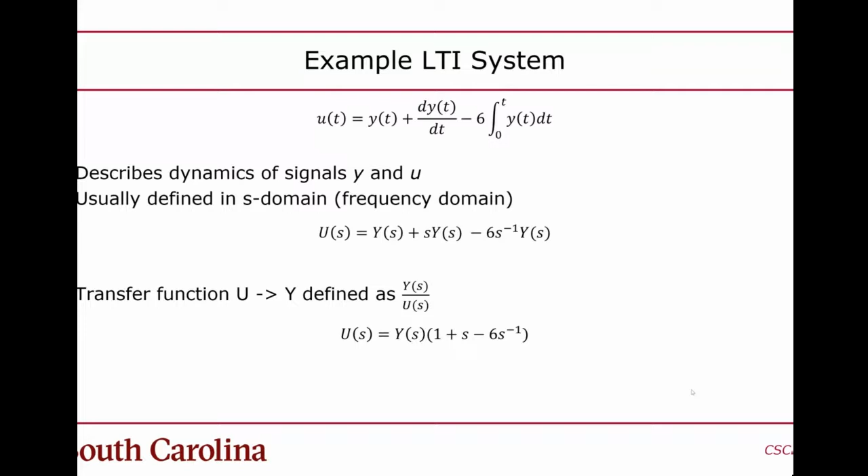So we talked also about stability, and so an LTI can be stable or unstable. The definition of stability is that if a system defined by an LTI is stable, it means that we will always get a bounded output as long as we give it a bounded input. Any bounded input should give us a bounded output. Now this is kind of complicated because you can build a system that is stable for some frequencies and not for others. But if that were the case, it would not qualify as a stable system because it has to be bounded for all inputs that are bounded. Now, what does that mean? Well, it means that it doesn't go to infinity, basically, as an unstable system would.

And so I mentioned that the goal of control theory, really, the objective of a controller, of a control engineer, is to bring stability to an unstable system. But it's a little bit more than that, because usually you also want the system to operate at a set point as well. So it's a little bit more than just making it stable. You want to make the system operate at a desired set point.

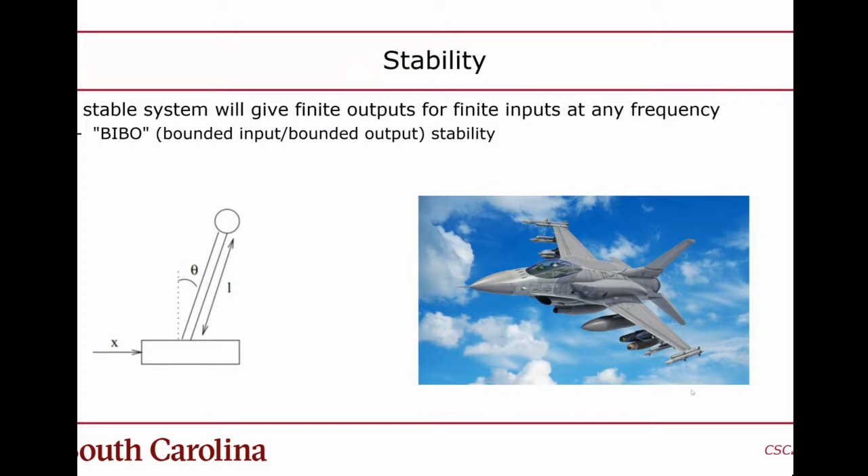So how do you know if a system is stable? There's several ways. You can hit it with an impulse response. The nice thing about impulse response is that an LTI system, if you convert it to the S domain, is already the impulse response. It's free. All you have to do is basically do the inverse Laplace transform, and that's it. That's the impulse response. So by definition, all of these transfer functions that we look at are already in impulse response form, because the S domain version of the impulse is 1. It's a constant. It doesn't have an S in it.

Now, if you want to do something like a step response or a ramp response or a sinusoid response, then it's a little bit more complicated to figure out what the response to that is. The way I do it is I just simulate it in software. There's probably a way you could work it out on paper, but like I said, I'm not even sure how to do that.

I think generally speaking, you just run it through a simulator, which is where all the results that I have in the slides here are actually from. But the impulse response is something that you could work out on paper, and the only thing I expect you to be able to do is to work out the impulse response. Also, you can find the poles.

Now this part is pretty cool because the poles are basically the values of S that will make the transfer function infinite, or make it divide by 0, basically. Now I mentioned S, of course, is a complex variable. So when you assign a value to S, then it's complex. But if the poles are values where the real component is less than 0, that means that all of the poles are in the left-hand plane.

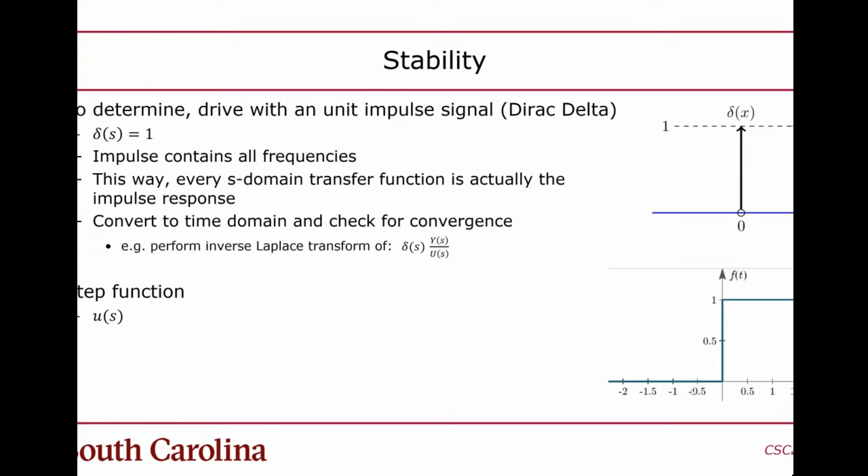Okay, so the impulse, the Dirac delta, is the impulse. It's basically an infinitely narrow pulse, usually at time 0. And then there's a step function, which is when you take the impulse and you do an integral of it, which of course in the S domain is multiplying by 1 over S. So those are two different possible inputs. So here is, I think I got to this last time. Did I cover this?

Hold on one second. Oh yeah.

So let me skip ahead a minute to transfer functions. I presented this a little bit in a weird order, so I'm going to skip ahead. So what's a transfer function? A transfer function is a way to represent a plant or a controller. Basically, you can put it in a block diagram. In a block diagram, it would be a block, and you'd have an input and an output signal, and they can be time domain, but generally speaking, you do this in the S domain.

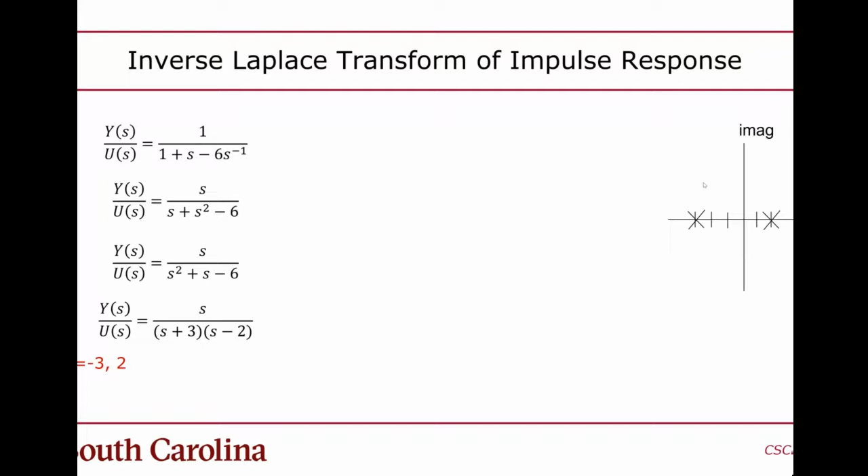Now you might say, wait a minute, are all your poles going to have a 0 imaginary component? Yes, in this class they will. We're not going to do any poles that have an imaginary component. So the poles are -3 and 2. You expect this to be unstable because of the 2.

And so to do the impulse response, the only thing in terms of manual responses that I'll expect you to do is to take the transfer function and decompose it in a way that allows you to obtain the eigenfunctions. The eigenfunctions are terms in the form of a constant over s minus a, because when you do the inverse Laplace transform, that is e to the at power.

That sounds complicated, but really all I'm saying is let's do some algebra to split this denominator into its parts, s plus 3 and s minus 2, because I don't know how else to do an inverse Laplace transform when you have a polynomial. You have to get it into the proper form.

I mentioned last time that you can do this by saying you want a over s plus 3 plus b over s minus 2, because that will be the split, and you want to solve for a and b. That'll be the decomposed transfer function. You can assume this is what you want, and if that's what you had, you could go back and recombine them by saying a times s minus 2 plus b times s plus 3.

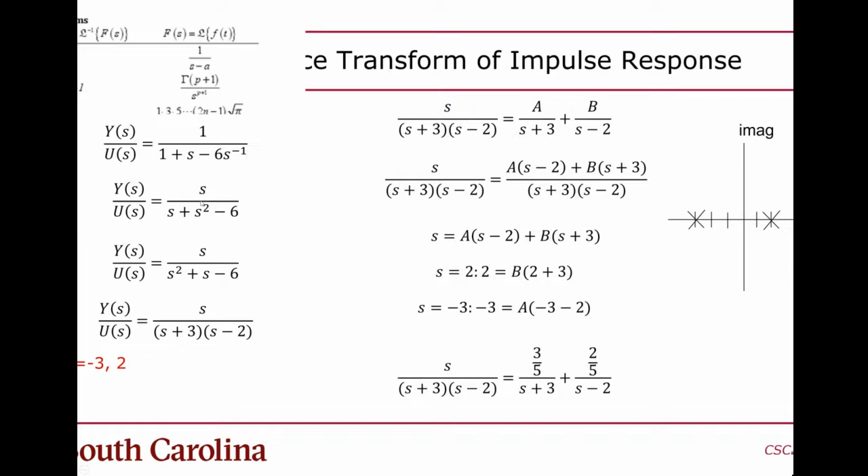And so you convert each of these pieces to e to the at, where a is the constant in the denominator, and of course the numerator you can just move out to the front. So this ends up being 0.6 times e to the negative 3t and 0.4 times e to the 2t. These are the eigenfunctions. And because these are in time domain, you can just vary t and plot this. You can plot the value of the function versus time.

And this now, it's a little weird though, because what you're not seeing here is the input. The input is the pulse, the Dirac delta, right? So you generate the plot for this, and you see that when you plot it, it's not bounded. The value just goes to infinity as we increase time. But you have to understand that what you're seeing is the impulse response, which seems crazy because you never actually hit it with the impulse. You just did this eigenfunction transformation, you increased time and you got the impulse response.

You can also do a step response, which I don't know how to do by hand, but I did it in MATLAB. So step response is just basically where you go from 0, you step it up to 1. Now, both the impulse response and the step response contain all frequencies. It requires an infinite number of sinusoid frequencies to add together to get this kind of step shape, right? And so this is why this is a good test for stability, because this is going to basically feed the function every frequency at once.

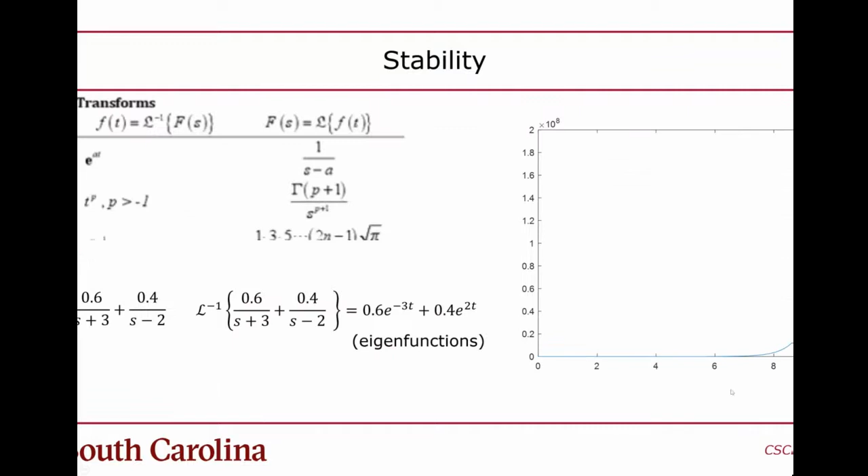And then of course you can hit it with a single frequency. This is risky because technically it's possible to give it one frequency and it not go to infinity. But in this case, I gave it 2 radians per second because in fact that was one of the poles. But I tried to give it a couple other ones, and it was still blowing up on me. So no matter what input I gave this function, it diverged to infinity.

Anyway, so let's look at another one. I changed the denominator in this transfer function to s+3 times s+2. That way I have 2 negative poles. This puts the poles in the left-hand side. And then I worked through the same math, and I got A is 3, B is -2. And so I got slightly different eigenfunctions here, which don't look that different, but boy, you get a much different impulse response.

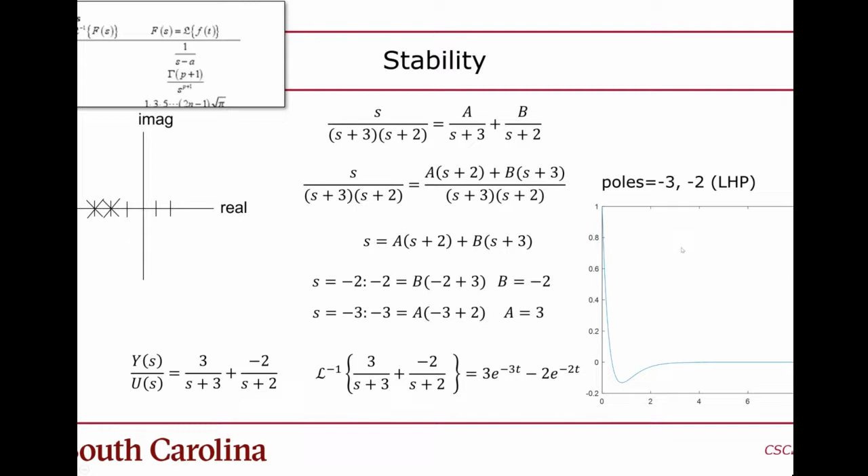And then likewise, I did the step response. The step response, once again, is much different from the impulse response, but it still converges on 0. And then the sinusoidal response is pretty much just the same as the input signal. I don't even get a phase shift here, but I do get an amplitude difference. So the amplitude of the input is 1, the amplitude of the output is 0.2. I don't really care. The point is that it's stable.

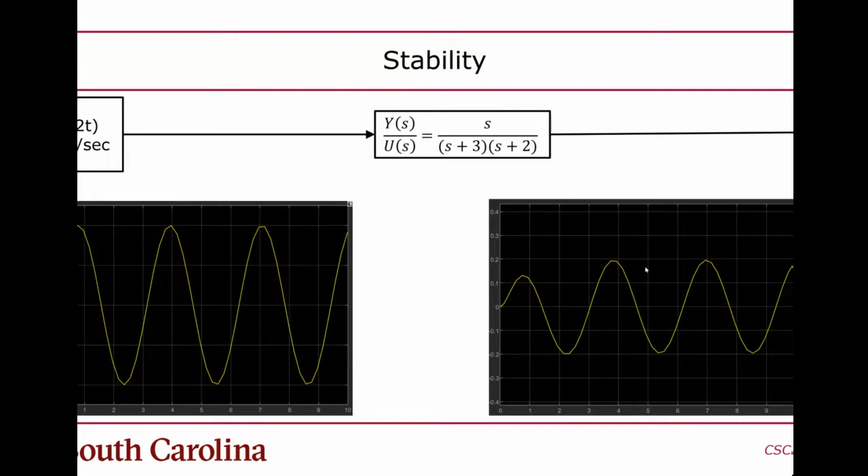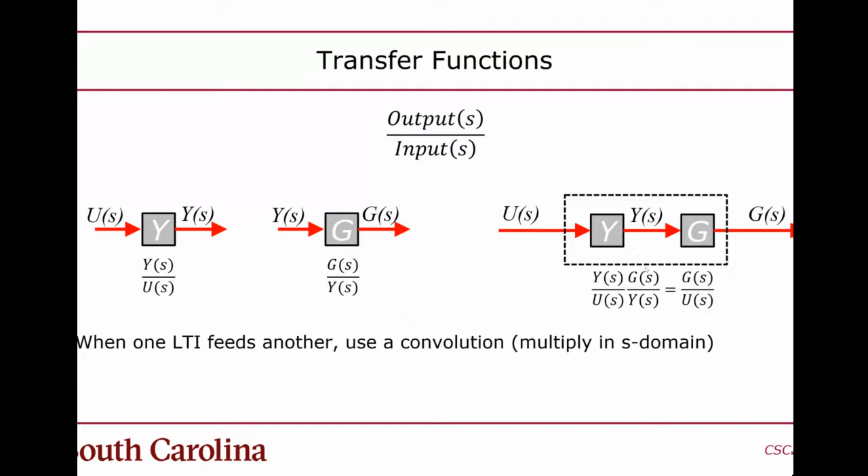Okay, so I mentioned transfer functions. So a transfer function is basically just an LTI S domain put in the proper form, output over input. So these transfer functions are usually just a ratio of 2 polynomials, generally speaking. The denominator polynomial, though, is generally shown with a 1 coefficient on the highest power of S. But again, it's not necessary. You can always adjust it algebraically.

Okay, so then I think last time I just started talking about physical system modeling. So this part gets really complicated. The point of this is that I wanted to show you how you go about modeling a plant. Now, I'm not going to go too much into this because this starts to get into physics or, like, an electrical engineering type thing.

Obviously, we're interested in modeling systems that are RLC circuits, analog circuits. That's a big one. So I mentioned like in power electronics, that's what you're doing. Any kind of pendulum sort of system or any type of motor-based system works well here modeling as an LTI. In flight controls, avionics, in vibrations too. Like if you have a cantilever beam that's vibrating, you can model its vibration using the stiffness and the mass. But doing all that is kind of like physics stuff.

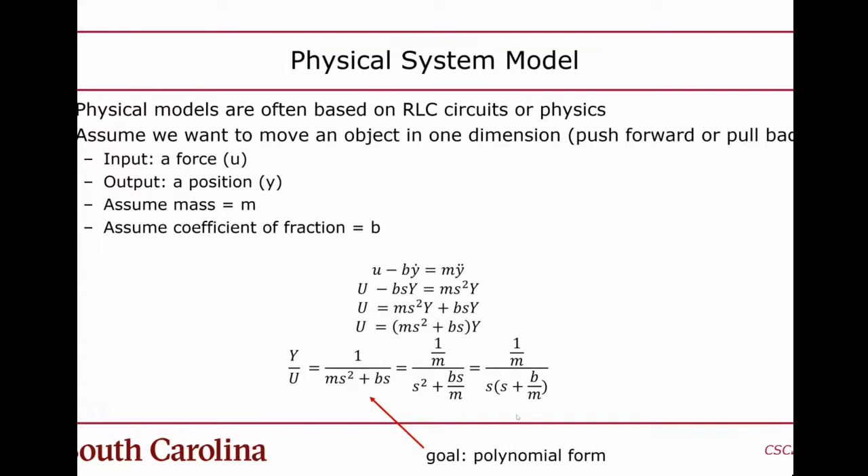Yeah, sorry. That was okay.

So then here's the step response. Predictably, this would be like saying, okay, 0 force until time 1 second, and then at 1 second, I'm going to apply a constant 1 Newton force forever. And of course, as you might imagine, you just push it forever.

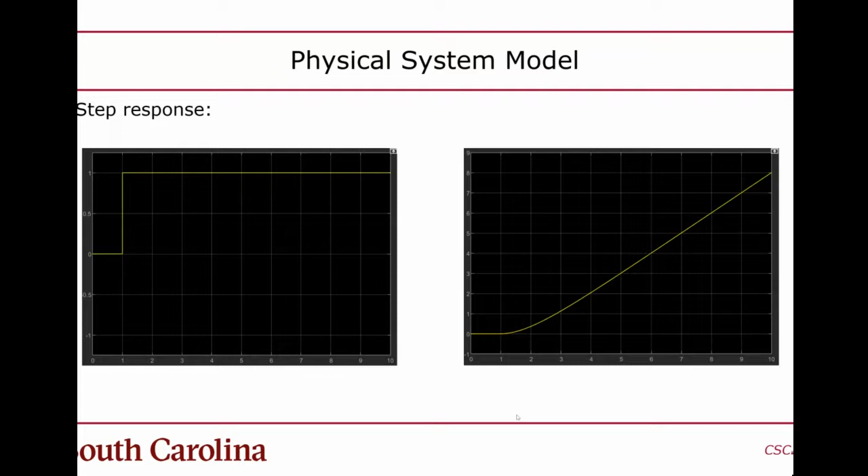So to control something like this, we need a closed loop control, and the closed loop control is when you have the plant, and it will be fed by the controller, and these two together represent a system. You just multiply them together, and you get a single transfer function representing both, and that is actually the open loop controller. So if you're only doing an open loop control, you're done. If you're doing a closed loop control, you have to add a feedback, and the feedback is the output of the plant fed back and subtracted from a set point that you want.

Now, if you had an open loop controller, your set point would go straight into the controller. But like I said, without the feedback, your system can't deal with uncertainties and disturbances. That doesn't mean that people don't use open loop control. It's used a lot.

But closed loop control is common when you have this potential for disturbances. Now, you might think, wait a second, if this was like an RLC circuit, capacitors and inductors and resistors, they always work the same way. Why would you need a closed loop control? Because there's

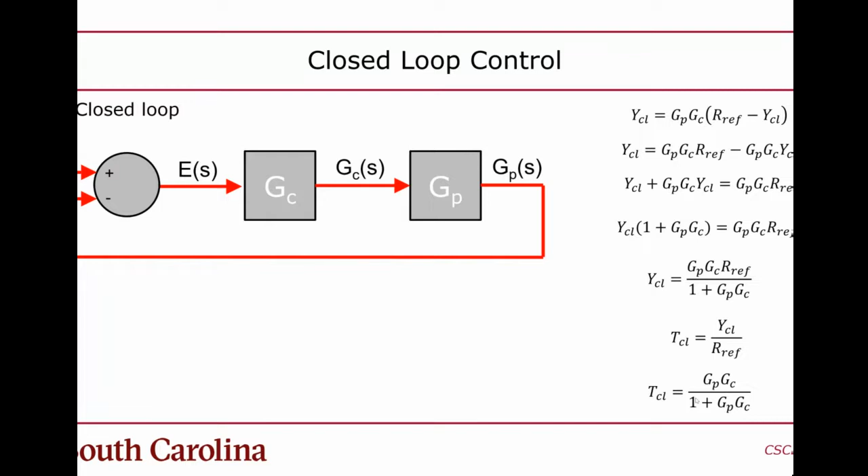But then you're going to take that closed loop thing and you're going to enclose it into a bigger closed loop system in order for the drone to maintain a certain altitude, for instance. So this transfer function is something that is nestable. Basically you can compose arbitrarily complex systems by just applying this closed loop equation, and you can take a whole closed loop system and put it as the open loop inside this outer closed loop thing.

Okay, so what about the controller? We haven't really talked about the controller. How do you build a controller? We talked about how the plant is modeled, but how is the controller modeled? How do we build the controller? Well, there's many ways to build controllers, actually. One way to do it is the PID controller. This is one that you guys, I think, are already familiar with from CSCE 274. I'm not sure how formally they presented the PID controller. The PID controller is pretty simple, though.

Basically the idea is that you take the error term, which is the difference between the output of the plant and the reference, and you multiply that by a proportional control, and that gives you the proportional output. And then there's a derivative where you look at the derivative of the error and multiply that against the derivative control. And when I say control, I mean these are constants that you set when you're tuning the controller. And then there's also an integral control, which is you take the integral of the error and you multiply that against the integral term. So you end up with three constants: kp, kd, ki.

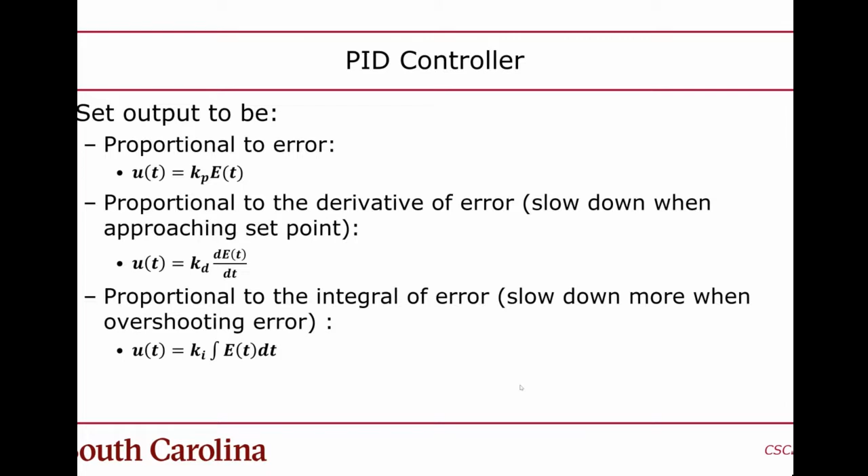And so with the proportional control, you look at how far away you are from where you want to be, and you multiply that against the proportional term, and you apply that to the input for the plant. The derivative is used basically to slow down once you get closer, and then the integral is to cut down on the ringing that you get. You could model these as three separate controllers, or you can put them all into one transfer function. If you put them all into one transfer function, it would look like this in the time domain. So it would be u(t) equals kp times the error.

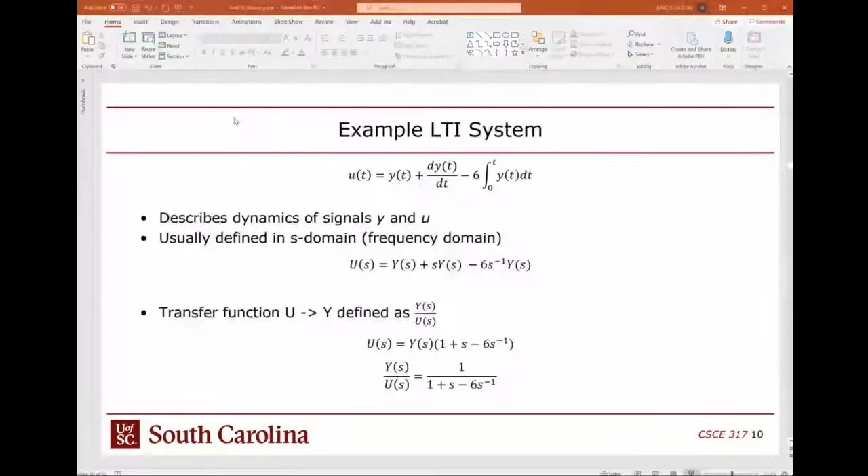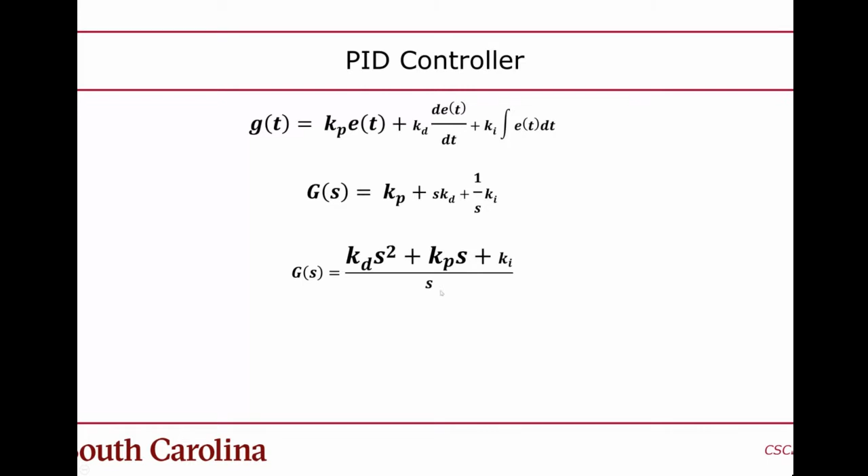And then, of course, once you do that, the Laplace of the integral is going to give you 1 over s. That's s to the minus 1. So I'll multiply both sides of this by s over s to put the numerator as a proper polynomial. So now notice that the PID controller ends up being another ratio of polynomials of s, which is what you generally will see with these transfer functions. But notice that the controller has a second order polynomial in the numerator and a first order in the denominator, which is a little different, but it's valid.

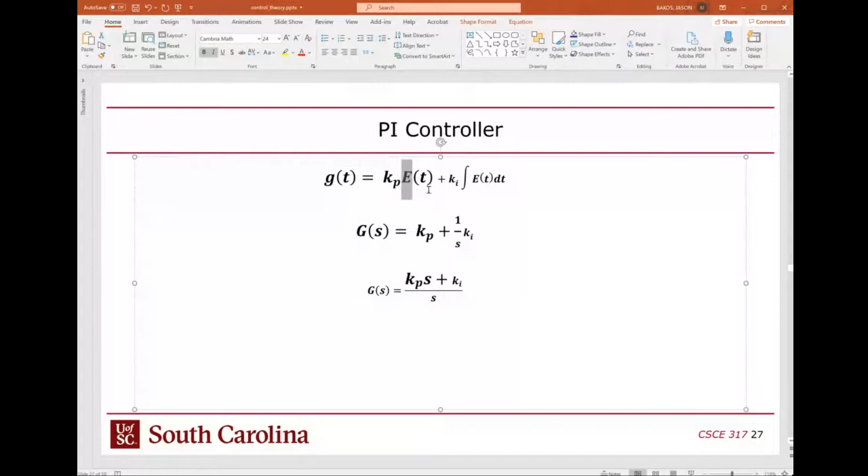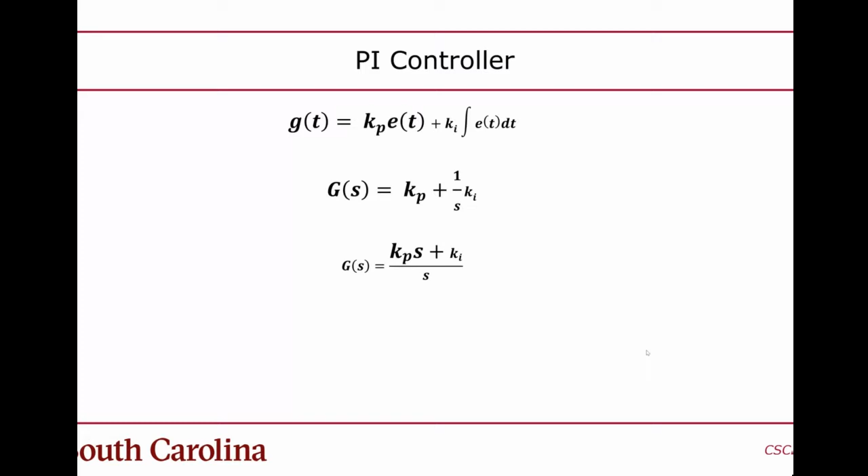And then, of course, you can also do a PI controller that just eliminates the derivative part, which I did just to simplify this, because I tried to work out an example with the full PID, and it just became too cumbersome. So we'll just do PI. And as it turns out, it seems to work fine with this plant to not have the derivative part. So this is the proportional and integral parts. And I'm going through this kind of fast because I'm assuming you guys are pretty comfortable with this from robotics.

Okay, so let's look at an example. So let's take the plant, which is 1 over m over s times s plus b over m. That was the transfer function of the plant.

That was basically moving an object to a line, or just moving an object in general and giving a y output where the input is force. And then I've got my PID controller, which I multiply against that to get my open loop transfer function. So far, I'm just working on the open loop transfer function. That's GC times GP.

And so I multiply those together, and I'm just going to simplify this by setting the mass to 1 and the coefficient of friction to 1. So now I end up with just 1 over s times s plus 1 for my plant. And then my controller, I'm going to leave the kp and ki as variables, because once I figure this stuff out, I'm going to have to set those to tune the controller.

So my open loop transfer function, after I multiply these guys out, and I'm going to kind of blast through this kind of quickly here, but basically this is just 1 times the kps plus ki, and then the denominator becomes s squared times s plus 1. So that's my open loop transfer function right there.

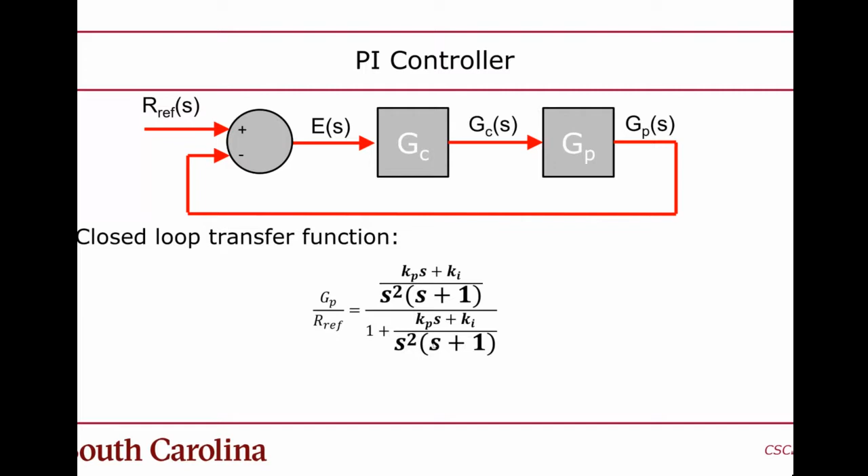And so now I have to substitute it into my closed loop transfer function, which is the open loop over 1 plus the open loop, right? So now you can see this is where it kind of got too crazy when I had the derivative term in there. So basically, I need to work all this out and get this into a form where it's polynomial divided by polynomial, right?

So hold on 1 second. Okay, sorry, I had to close the door.

Okay, so basically, it's just time to do some algebra. So I took the denominator and I merged it into one fraction. So that 1 became the denominator. So s squared times s plus 1 plus kps plus ki divided by the common denominator. And once I got the common denominator, then I was able to cancel that out.

So now I have kps plus ki over the numerator that I had on the fraction on the bottom there, which was s squared times s plus 1 plus kps plus ki. And so just rearrange that a little bit, multiply this guy out. So now it's s cubed plus s squared plus kps plus ki. So now I have a proper polynomial in the denominator and in the numerator. But what do I do now?

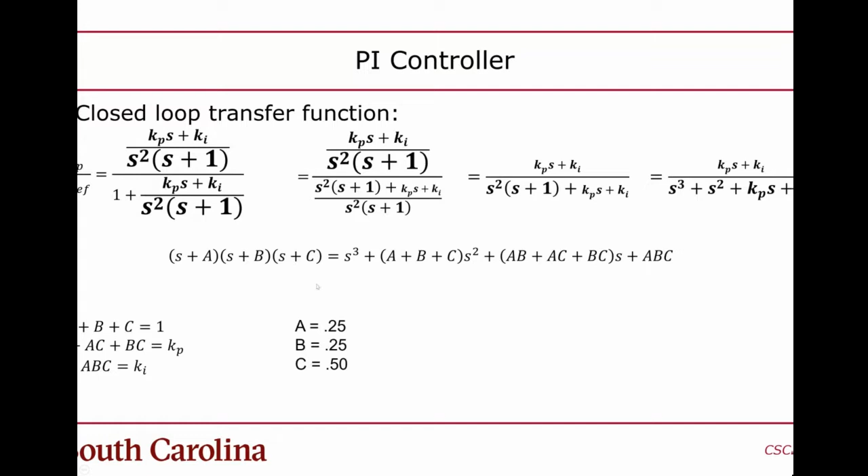Now the step response is actually indicative of what the controller is going to look like when you use it. Think of the step response as: I want the object at y equals 0, now I want the object at y equals 1. And so you change the reference, which is the input to the whole closed loop transfer function. And in response to that, you're going to see y, which is the position of your coin or your marble or whatever you're dragging across the tabletop. And hopefully y should track the set point, right?

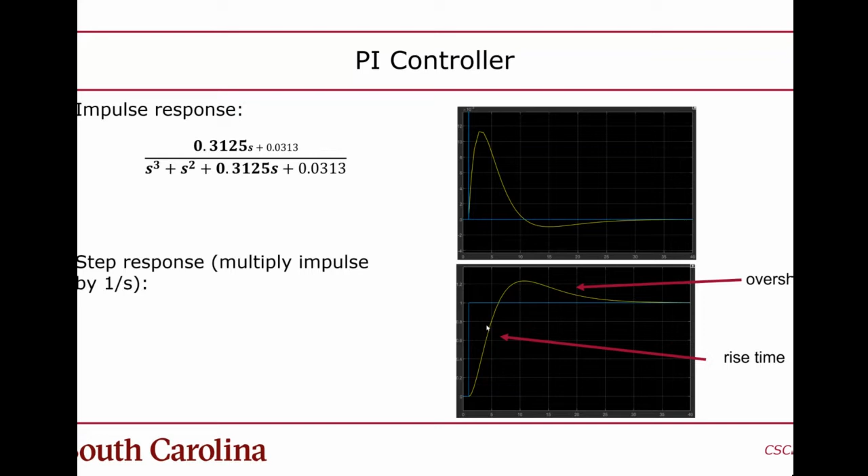But this rise time and overshoot, you can see quite clearly, are kind of undesirable. The rise time is too slow and the overshoot is too high. So let's take a look at going back and tweaking a little bit. Now, again, this is kind of ad hoc. I'm going to take the Kp and bump it up to 1.25.

And you can see this is the before and the after. When I increase the proportional response, it made the rise time better, but it didn't do anything about the overshoot. The overshoot went up to almost the same level, right? So rise time was better, but now I need to do something about the overshoot. So I'm going to increase the integral part.

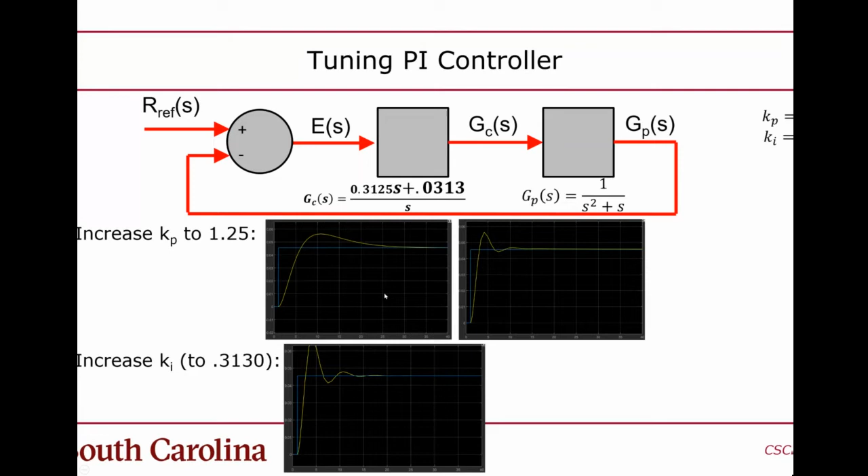And look at that. When I increased the integral coefficient Ki, it made the overshoot even worse. It went beyond 0.06 there, right? So obviously increasing Ki was the opposite of what I should have done if I was concerned about this overshoot.

So, that's just some examples. I don't want to go too far into that because this is not a control theory class. And I want to get to the more important thing, which is the discretization of this controller, which is what happens when you actually run this on a computer.